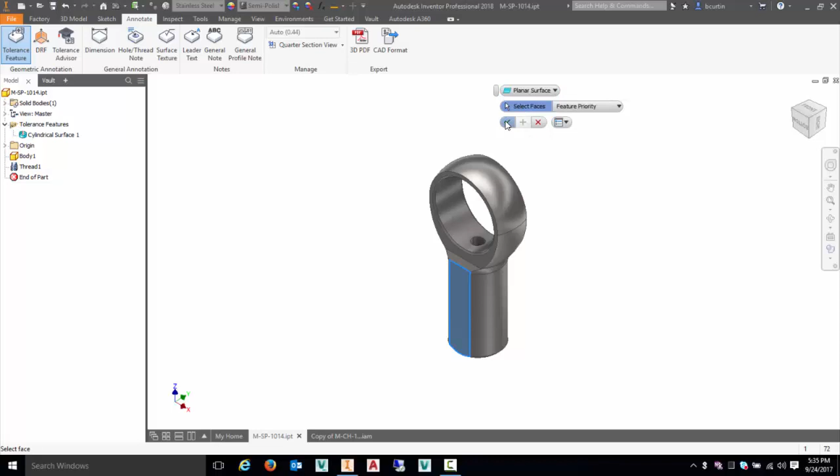So in the drop-down list on my little mini toolbar up here, I've got either planar surface or slab available. I'll just leave it on planar surface and I'll accept that selection. Once I've accepted that selection, now I can place the annotation itself. So in this case, there's a couple different planes I could place it on. I could place it on the one you see in green right here.

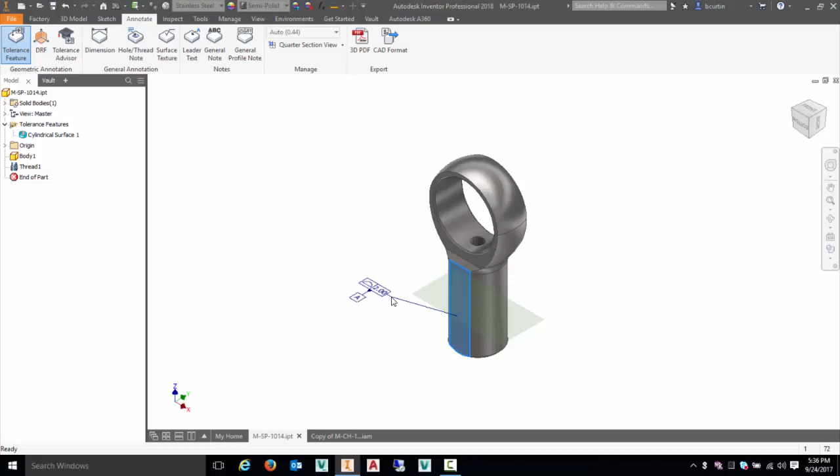If you want to toggle that and see a different plane that's perpendicular to the surface I have selected, just hit spacebar on your keyboard and you can see how that toggles those back and forth. So I'll use this plane right here and select to place that. Now once you've got the feature on the part selected and you've located a feature control frame or the annotation, you can now start modifying those as well.

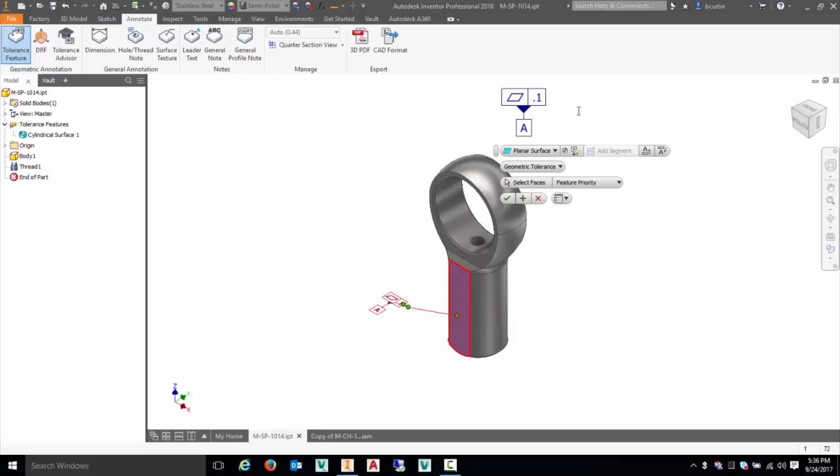So in this case I really didn't want a profile, I wanted a flatness on that. And I wanted to change its tolerance as well. So this is a metric part, so let's just make that maybe 0.1 millimeters. And you can see it's updating right here, as well as in the preview down below. So if the mini bar is not exactly where you'd like it, you can click and drag that to a new position as well.

Notice there's a lot of other options in here as well, so if you don't want your datum reference or your datum feature turned on, you can toggle that off. I will leave it on for now. And if we want, we can also add notes either above or below as well. So notice I can add text up here, or toggle that back off if I want. I'll just hit enter and we can leave that text. Or to remove it, just backspace out of that so that there's nothing left.

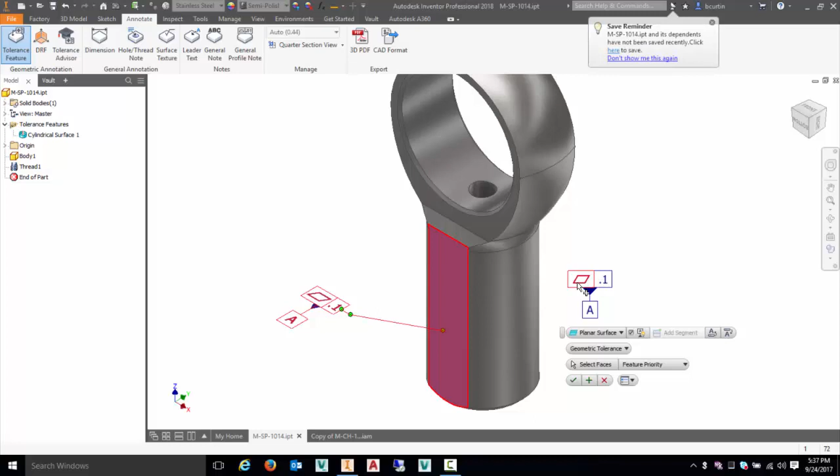Okay, now I've also had some customers that have said they really just wanted to identify the datums in the component. So to do that, you do everything we've done up to this point, but you wouldn't worry about selecting your feature control frame option right there. You can actually just pick that and remove that feature so we can be left with the datum itself. I will add that back in.

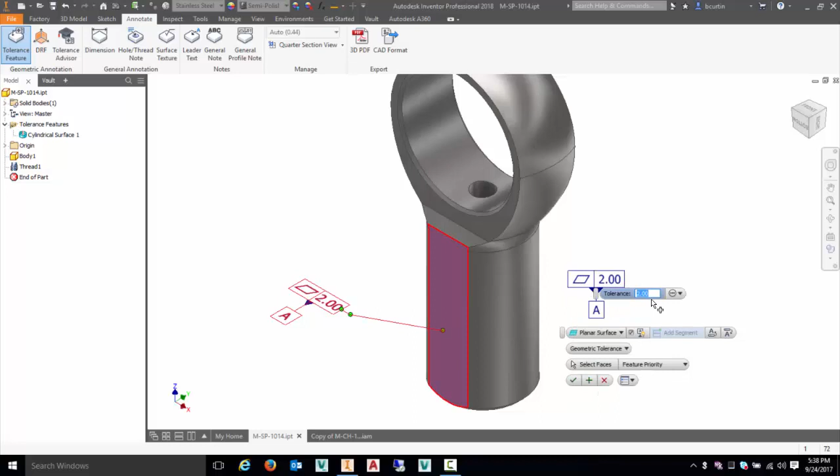You can see here I can add a feature control frame after the fact. And again, we'll update our tolerance value. And that looks good for me for now, so I'll go ahead and OK that.

The first time you go ahead and annotate one of these, typically this tolerance advisor will show up, and we can see we've got a bunch of messages that we've got to fix with this component. We've got to fully constrain the size, constrain the form, and the locations haven't been constrained, and so on. This is just telling us what we could complete as far as our model annotations go.

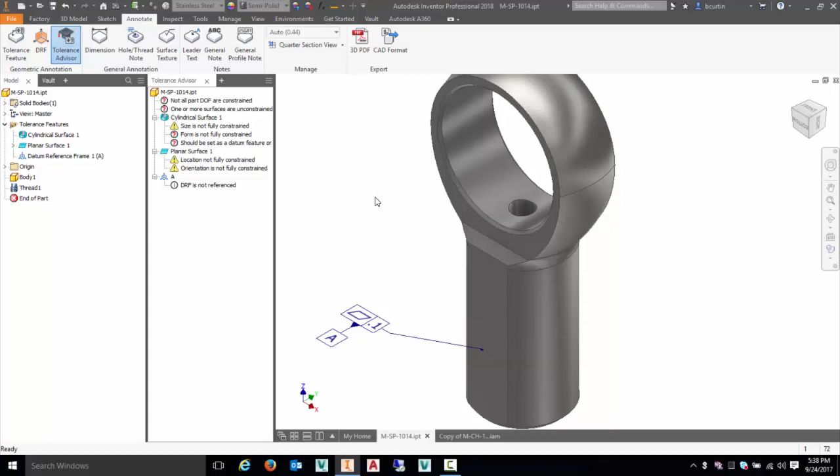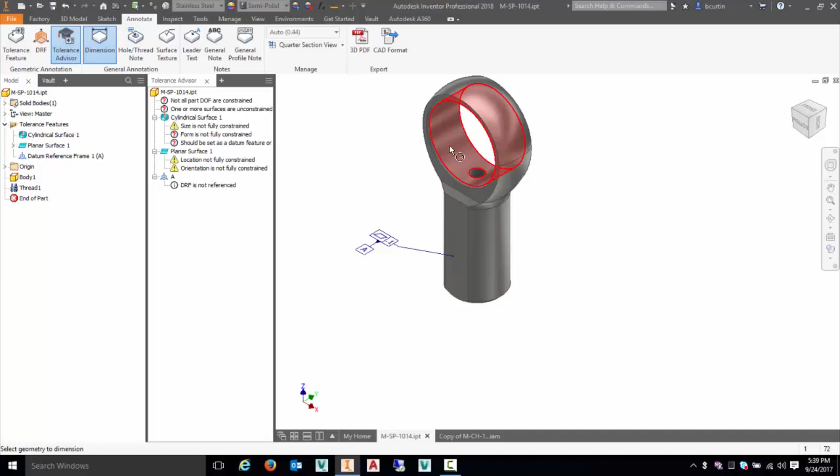So that was just simply a tolerance feature. There's also hole and thread notes, regular dimensions, and so on. If I had actual hole features in the part, I could select this. I don't have any in this case, so let me just select a dimension instead. You can see it's going to assume a diameter or a radius if I select a cylindrical face.

And we can set a precision as well. And I'll go ahead and select a symmetric type tolerance for that.

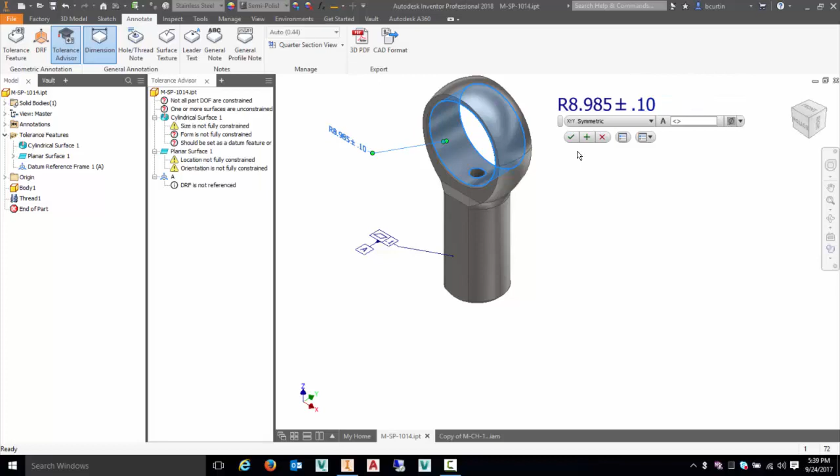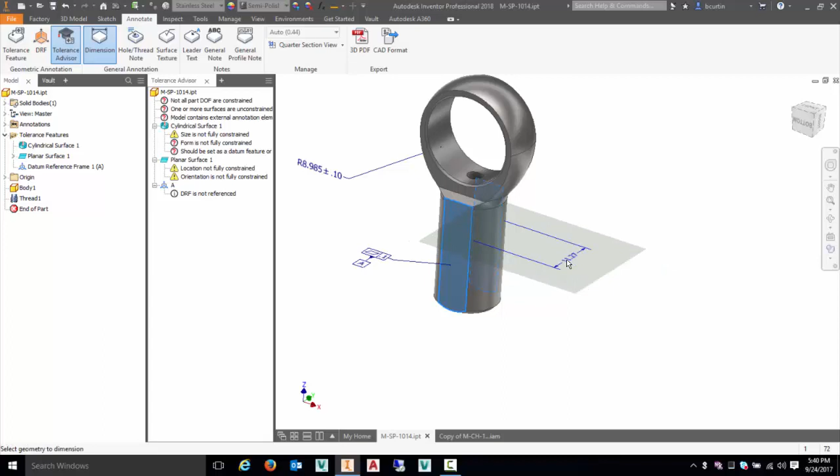Quite a bit of other types, other dimensions here as well. We could select a face and then another object or something. If I want to select one face here, we can rotate the part around and select another face. Now we have the opportunity to place a distance dimension, and notice I could actually hit the space bar as well and dimension that in a couple of different planes. So I'll dimension that off the bottom in this case.

Notice there's many types. I've just been using symmetric because it's easy to plug in a value for, but you could have deviation options, limits, max and min, you could have hole fits, and so on.

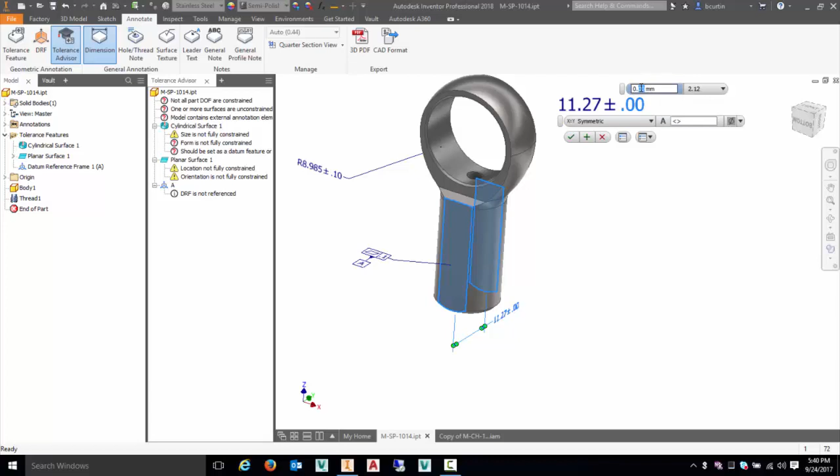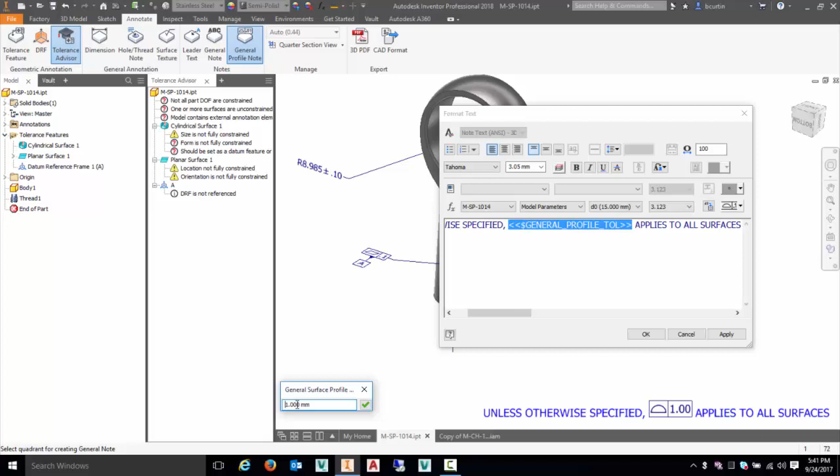Then there's even some other types, surface textures, just plain leader text. You could add general notes, and then a general profile note as well. A profile note just lets us go ahead and place essentially a catch-all note on this particular model. You see this many times on detailed drawings. Let me go ahead and select the area here where the tolerance would be, and I can edit that just by clicking the little icon right here. Let's just say that the overall tolerance on this is 0.1 millimeter for anything that we haven't otherwise detailed.

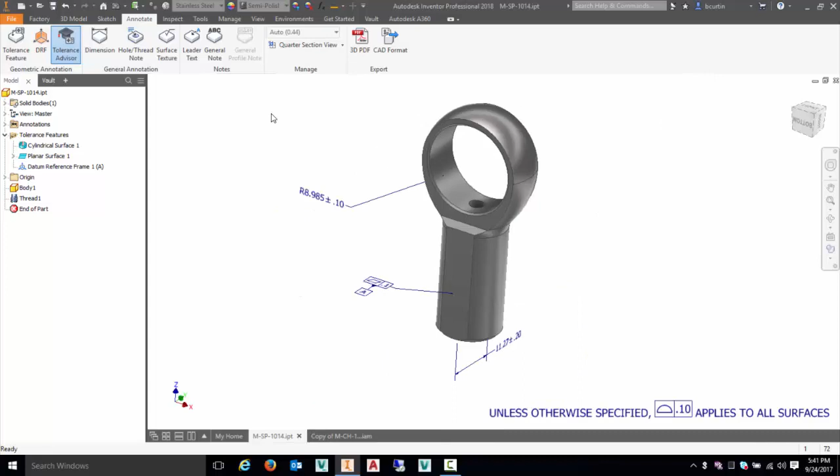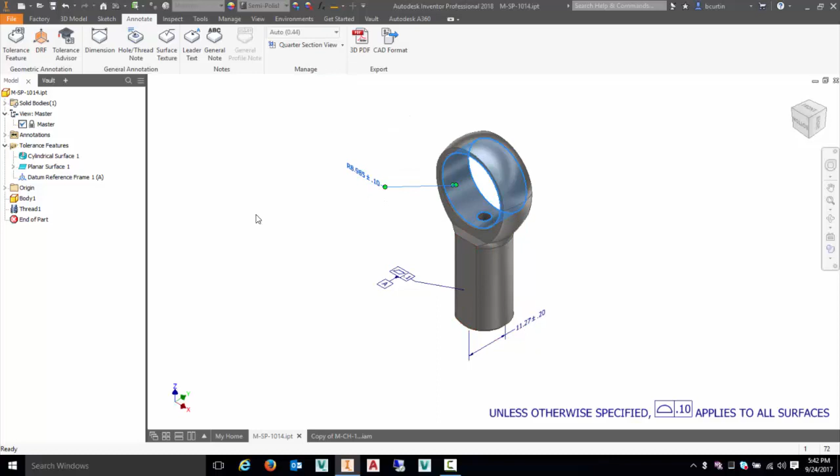One other thing I should mention here, and I'm going to hide my tolerance advisor, is that you may want to start taking advantage of some of the view representations available here as well. For example, if you're going to have an isometric view in a drawing later on, you may want to alter this component so that the dimensions are where you want in an isometric view like this, and you can save that. Maybe I'll go ahead and copy that, and I'll call this an ISO view.

And then maybe some of these dimensions are going to make sense from a front view or something like that. So let's go ahead and I'll copy this again. I'll make one for front, and I'll make that active. And I'm going to actually click what I consider the bottom right here.

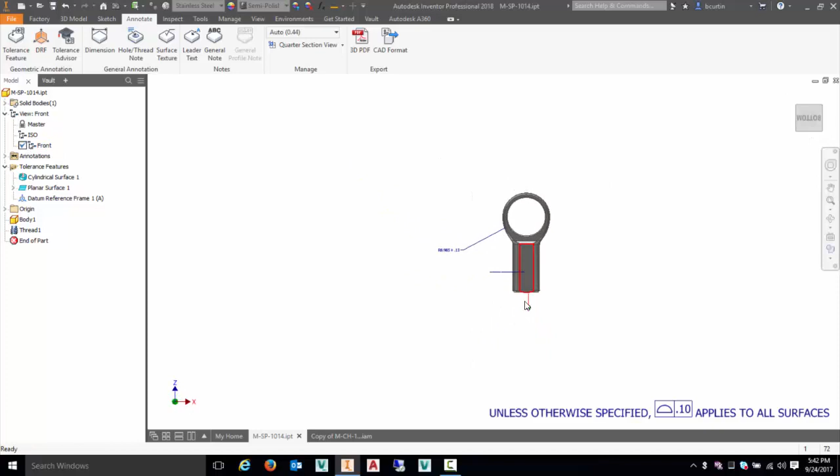So a couple of these other annotations wouldn't make sense in that view. You can go ahead and turn the visibility off of the annotations on a view-by-view basis. In this case, we've got a front view here. We can go back to our ISO, and they're turned on in that view. This is going to allow us to show which annotations we'd want if we're creating detailed drawings of this in the future.

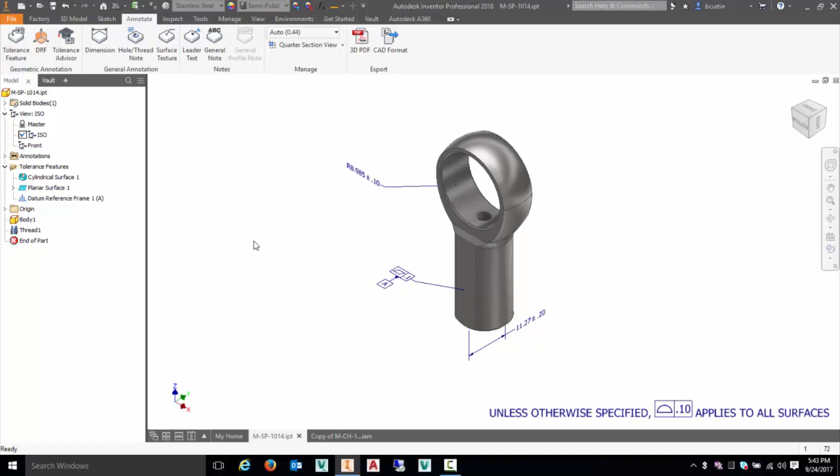And that'll be a subsequent video. So again, thank you this time for viewing this Autodesk Inventor model annotation explanation. This is new for Inventor 2018, and come back and take a look at how you go ahead and take advantage of these in your drawing views next. Thank you.